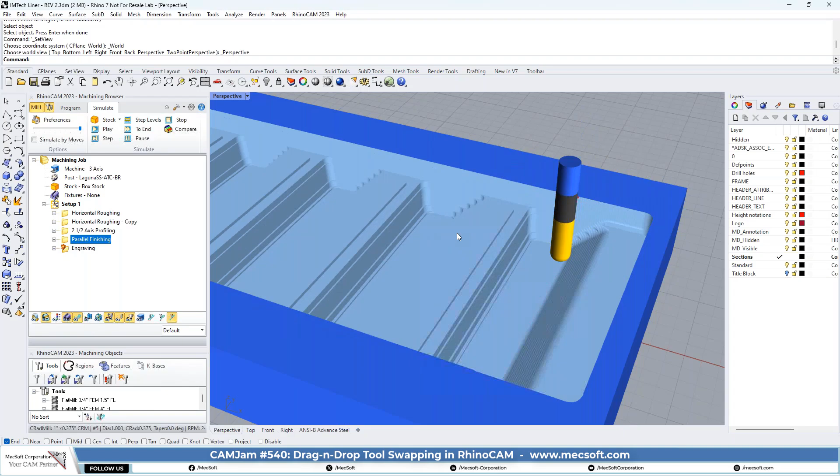Now I'm going to pause that just so you can see what that looks like. We don't need to go all the way down it.

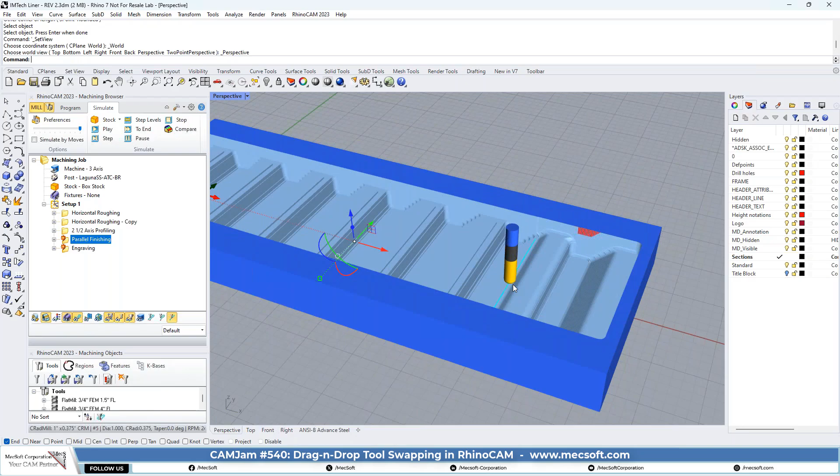Now if you want it to be even nicer than that, we could use the same tool as the roughing, so that all this is smooth with the same 3/8 inch fillet all the way down it.

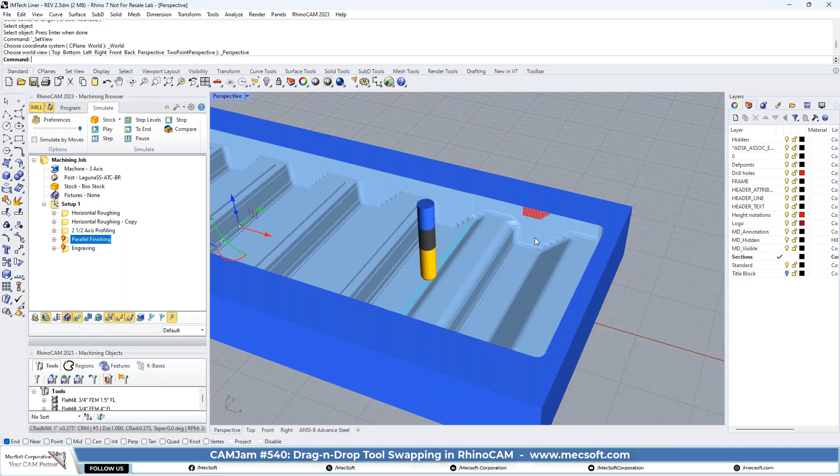Now before I go too far into that, have you got some comments or questions? Do you not like my approach? Would you like to go in a different direction?

Well, I don't mind that approach, other than I don't have that cutter. Okay, okay. You could go ahead and do that with your 3/4 inch ball. We could do the roughing and the finishing with the ball.

And we can see what that looks like. Let's go ahead and take that 3/4 inch ball. I'm going to drag it up to this. That was going to take out the material very fast with all that roughing.

I didn't understand all of what you said, it broke up a little bit. Say it again. I don't know if that ball end mill will react to the feeds and speeds to get that material out very fast. You know what I mean?

Yeah, yeah, I understand all that. It will give it a better all-around finish. But if it doesn't matter, then we don't have to run it with the ball and the roughing. I just want you to see. It's just a rubber mold.

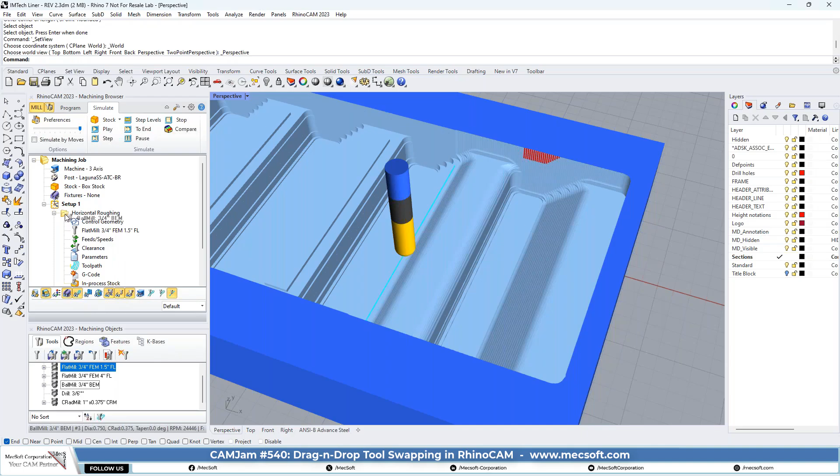I think it'll be fine without the, just finishing it with the ball and roughing it with the other. Okay, so roughing it with the end mill and finishing it with the ball. Is that what you said? Okay, yeah.

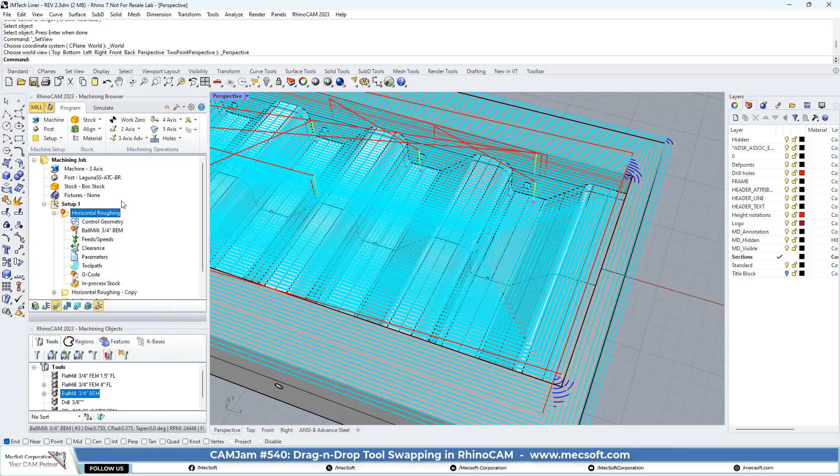Because as you saw, what happens is you get a sharp corner here, but here you have a fillet, you have part of a fillet, so it just doesn't look good. So when the flat goes, it will go all the way up to this wall, as you saw, it has a sharp 90-degree edge here.

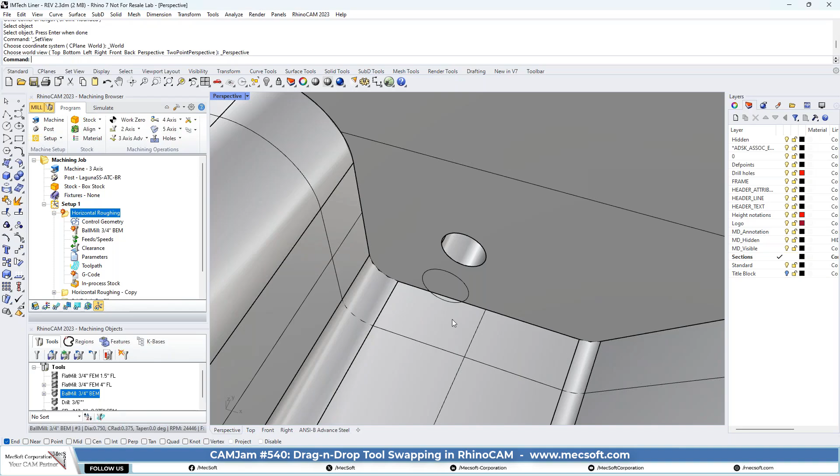But then when we did it with the ball, it come in with a ball, and it cut over this square edge, and you ended up having part of a fillet, a whole fillet here, part of a fillet here, a whole fillet. So we can stay away with the flat mill off them edges to where we get that full radius.

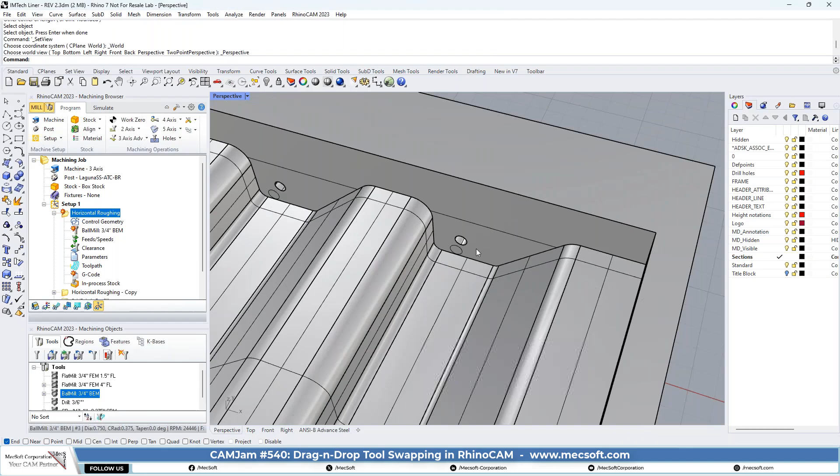Yes, that's a good idea. Yes, we can do the roughing up to this point. Correct, we could do that. Let's go ahead and do that.

Let's go roughing, and I'm going to use the same rectangle for now, just to show you. I know you want to rough more in there, but I'm going to just use that for now. For the tool, we're going to use the flat end mill, I guess the 4-inch.

Okay, that was so many. Okay, that. I'm thinking. So the ball has pretty good feed on it to cut. That looks like a ball mill.

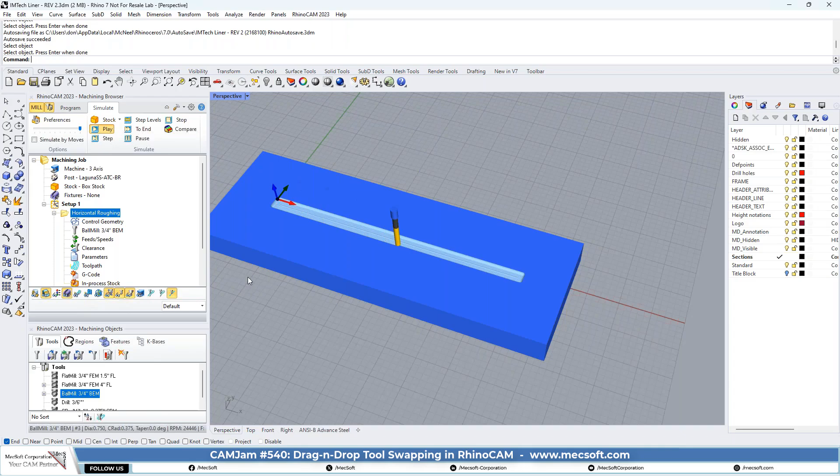Yeah, it is. Yeah, I want to climb mill everything as well. Yeah, okay, so let's.

And if it's possible, just leave like a 3/8 step in the bottom of those pockets, so that 3/4 inch ball mill doesn't have to cut 3/8 of an inch off that wall, just down by where the radius is. Okay, so there's that one.

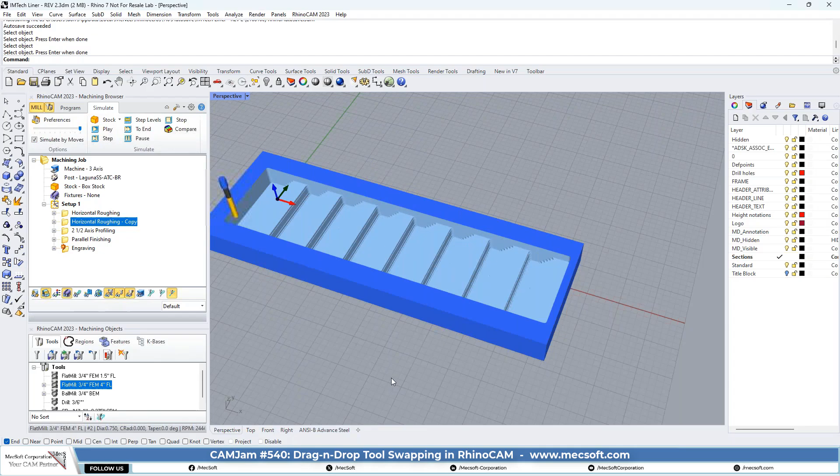So that still has that corner radius. You don't want to use that. Let's try a 3/4 inch ball mill.

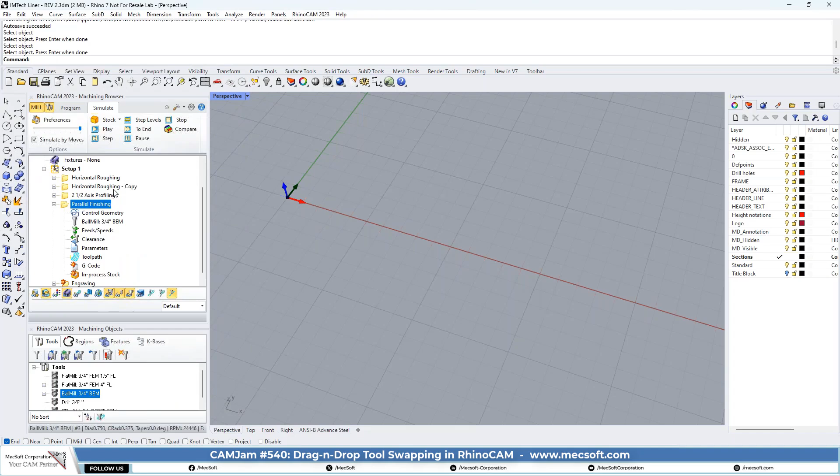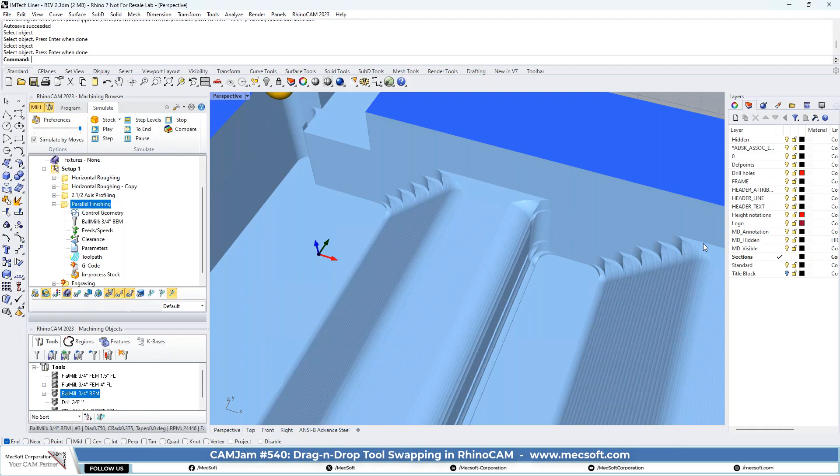Okay, so here's what I'm getting at, the sloppiness. You got the corner here because you're using the end mill. You got a corner here, and then we're running a ball mill, which leaves all this material in the corners.

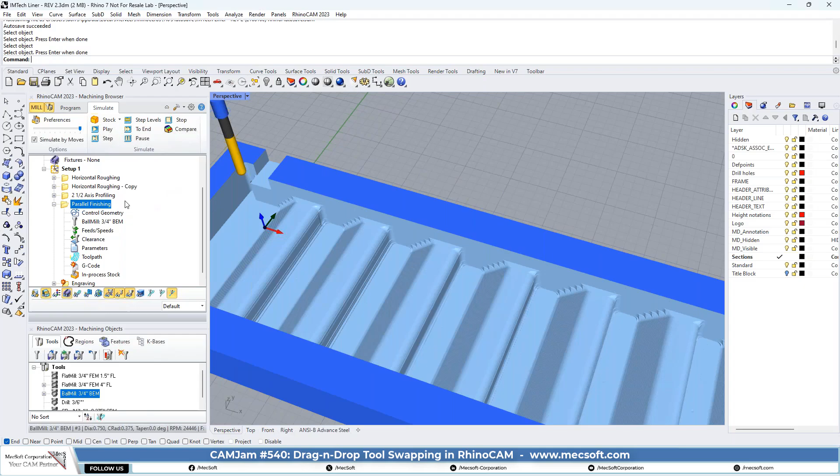Now I'm thinking, give me a minute. I'm thinking how the best way to do that. Okay, let's try this. Let's throw in a 3-axis horizontal finishing.

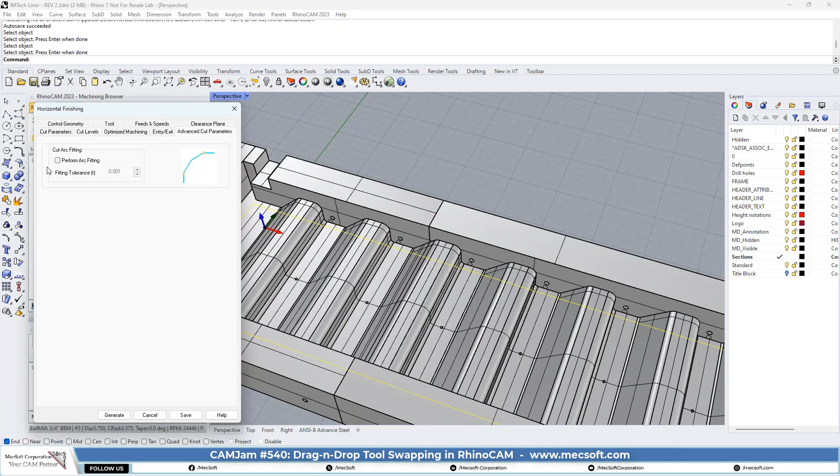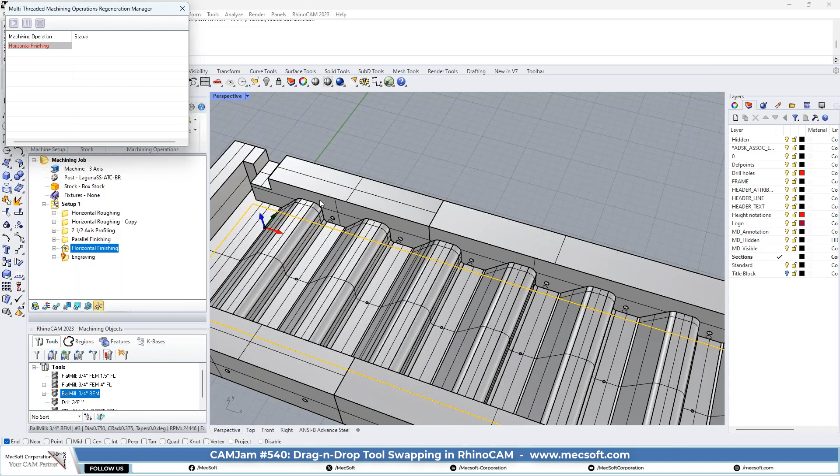Or what if it gets rough to a certain point with the 3/4, that one, flat end mill, and then we do like a couple roughings, or one roughing with the... that's what I was saying, just stay off the wall with 3/8 of an inch.

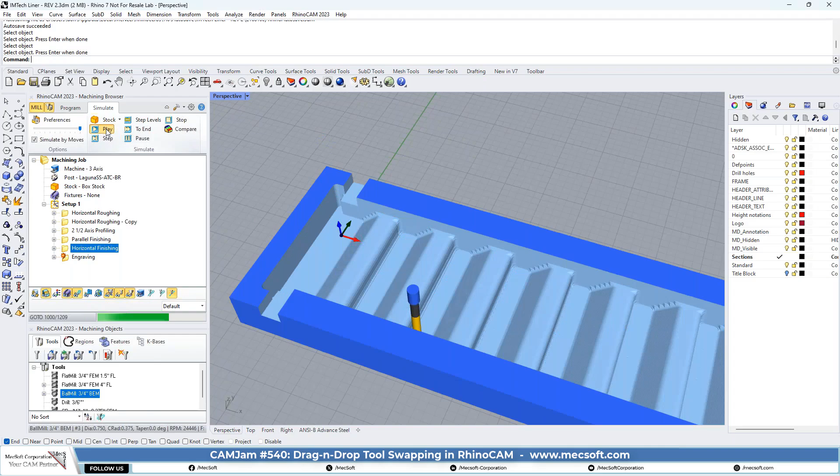Okay, so you see what a horizontal finishing path did? It cleaned up the sidewalls at the same time. Let's see what that looks like when it's done. So let's do that up here. It didn't really help it a whole lot.

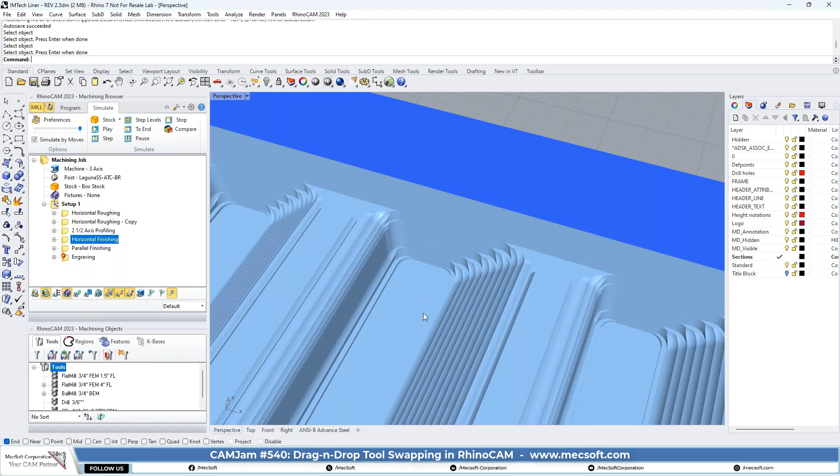Now, what were you saying with the ball mill? If you ran the roughing with the ball mill, then it's going to look pretty. Then it's going to look nice. Well, yes, we'll just run it with the ball mill just so you can see it.

So all we got for a ball mill is a 3/4 inch. That's fine, let's just run it with that and see what it looks like.

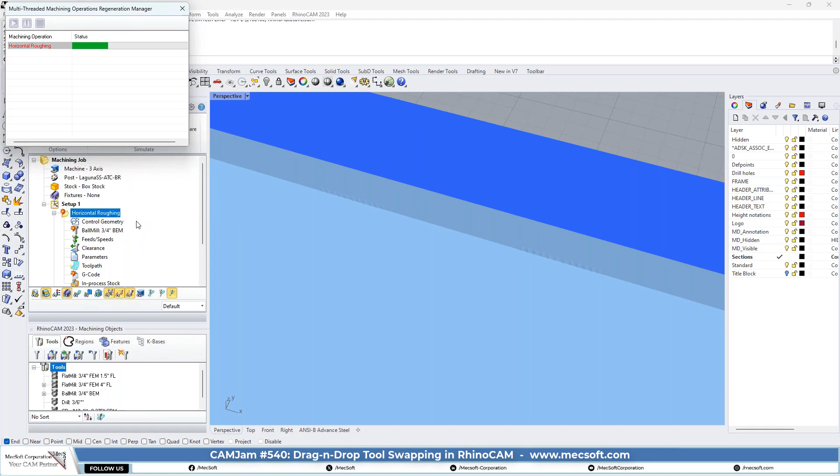That first layer, you can cut right in it. First 1.25 inches. Okay, so that's the first one. So we need to do that one with the ball mill too, if we're going to put that radius in there.

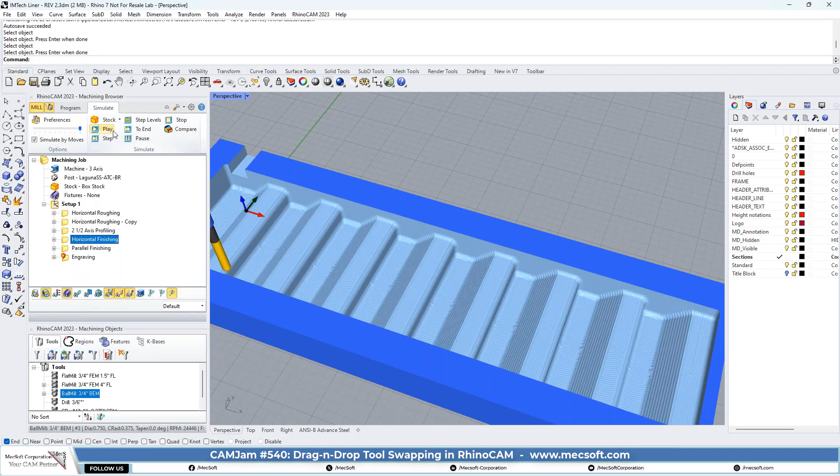Okay, you see how nice it is? Yeah. What's the runtime on that? I didn't set any feeds and speeds, so it's not going to be accurate, but we can just run it on.

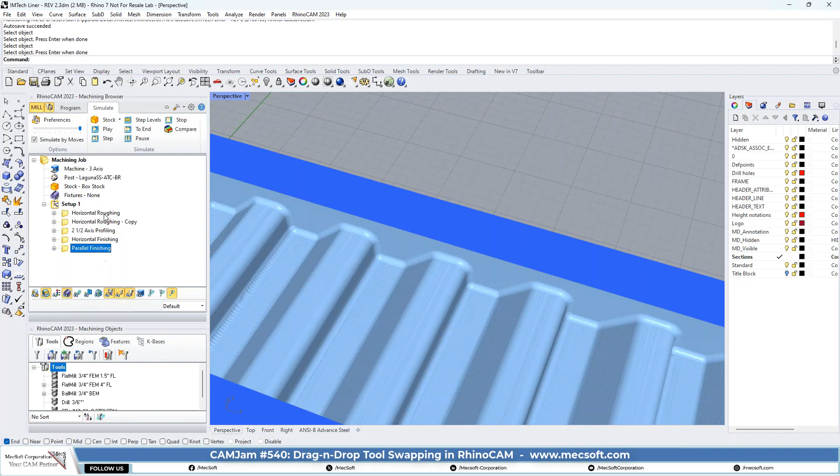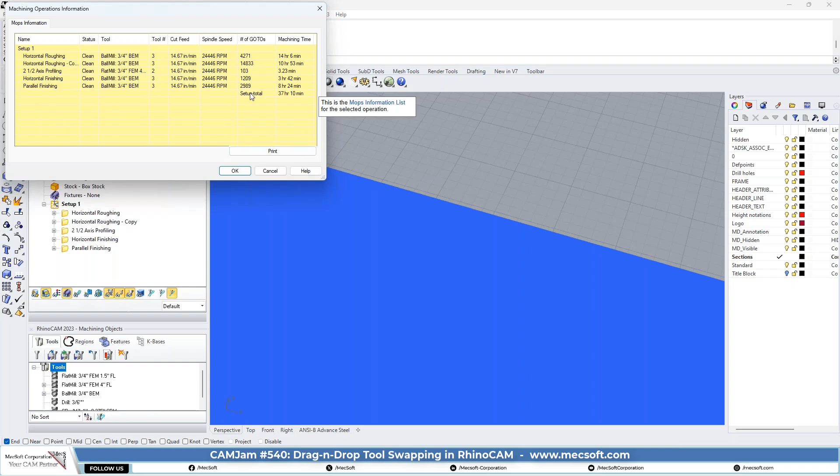I don't want the engraving. I know that, okay. It's going to just give you whatever the defaults were. 37 hours. See, we didn't set any feeds and speeds, so you'd have to enter in your actual cutting feed rates that you plan to use, in order to get an accurate representation.

So it's up to you, whichever one, however you want it. They're both in here. When I send you the file, they're both going to be in there, however you want to run it. Oh, we need this finished like this.

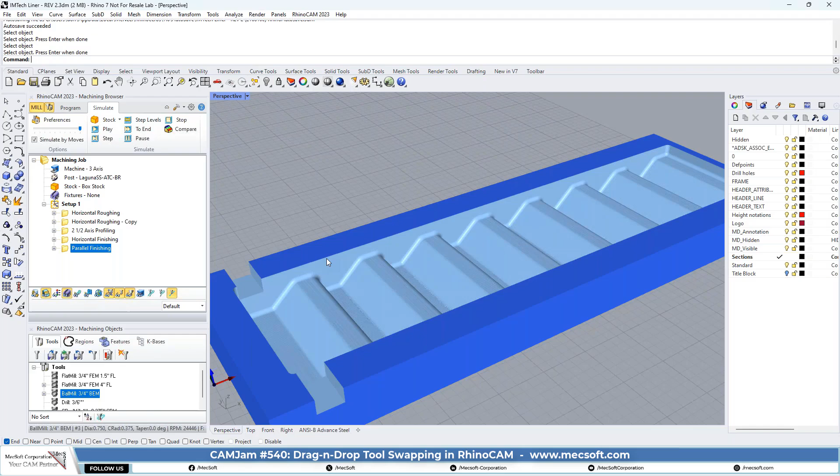What if we cut with the normal end mill down as far as we can until we get to the tip of that radius, and then switch here to that? You're still going to see all the sloppiness in the sides, in these angles.

No, just the very top, because we're basically cutting the first inch from the top. I see the way...

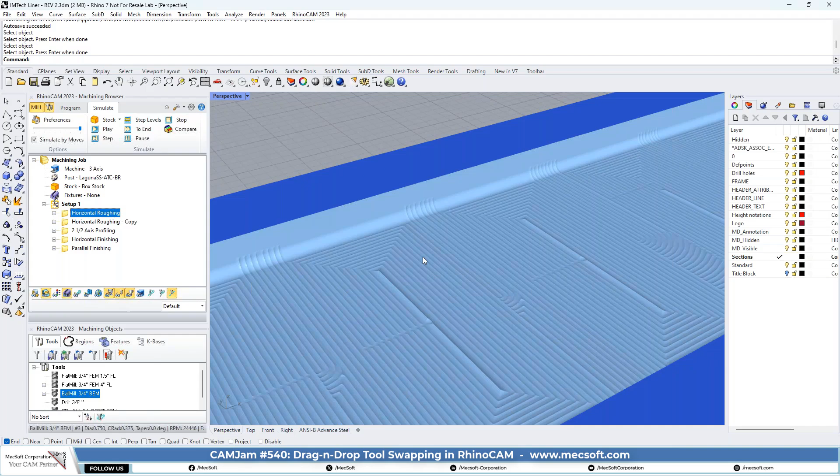What you're saying, this first one here, yeah, first, but we'll have this one. So we need to keep this one, but we need to do one before it with the regular end mill that cuts down to the point that we can here, right here to this point. Yeah, this edge right here.

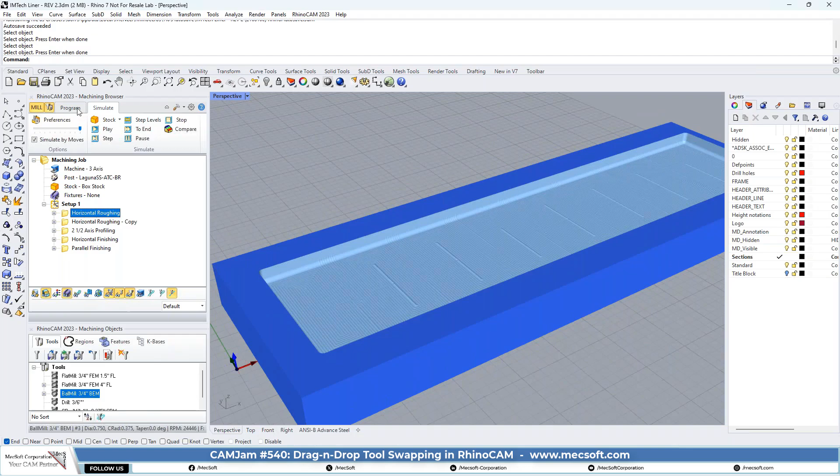Yeah, we can use a regular end mill to take most of the material out of there. So what you're saying is to go 3/8 of an inch above this surface.

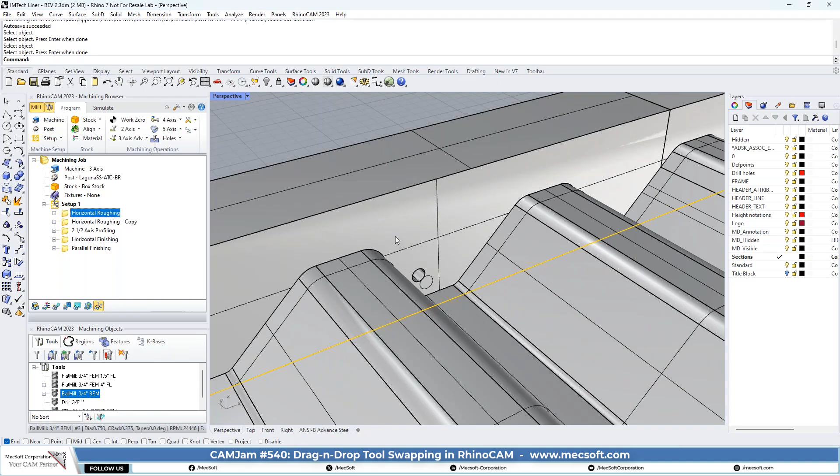Yeah, yep, that's what you're saying. So in that case, let me think about it. Can we do that to all the surfaces? But you already got one to cut the other pocket out, so we're okay there, right?

Let me just, let's do this, let's go ahead and edit this. You said you wanted to use the flat. We'll use the flat, that's a flat, I guess it'd be the smaller one. But on the cut levels, we're gonna set the bottom.